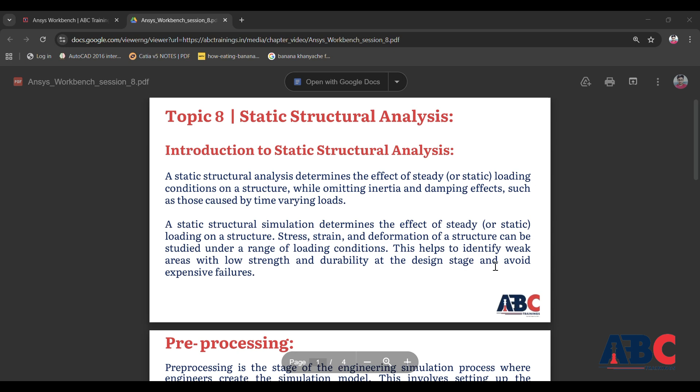Stress, strain, and deformation of a structure can be studied under a range of loading conditions. This helps to identify weak areas with low strength and durability at the design stage and avoid expensive failures.

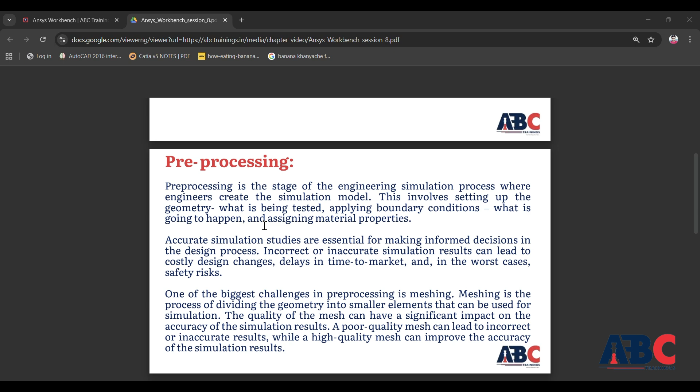Pre-processing is the stage of the engineering simulation process where engineers create the simulation model. This involves setting up the geometry (what is being tested), applying boundary conditions (what is going to happen), and assigning material properties. Accurate simulation studies are essential for making informed decisions in the design process.

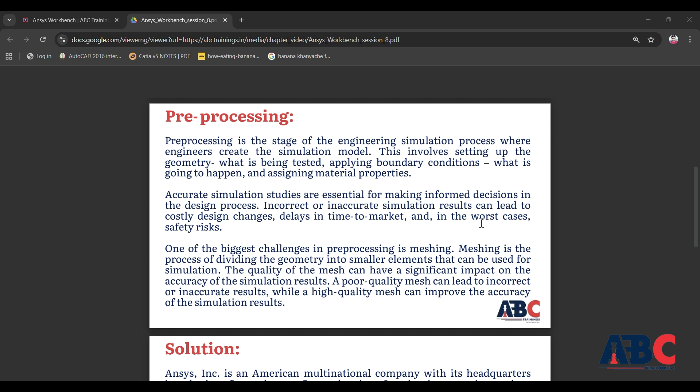Incorrect or inaccurate simulation results can lead to costly design changes, delays in time to market, and in the worst cases, safety risks. One of the biggest challenges in pre-processing is meshing.

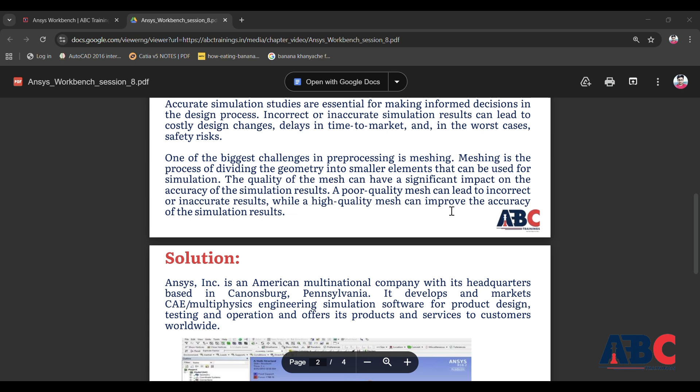Meshing is the process of dividing the geometry into smaller elements that can be used for simulation. The quality of the mesh can have a significant impact on the accuracy of the simulation results. A poor quality mesh can lead to incorrect or inaccurate results, while a high quality mesh can improve the accuracy of the simulation results.

ANSYS is an American multinational company with headquarters based in Canonsburg, Pennsylvania. It develops and markets CAE/multiphysics engineering simulation software for product design, testing, and operations, and offers its products and services to customers worldwide.

Post processing. What is post processing? It is an efficient way of validating the results of an analysis.

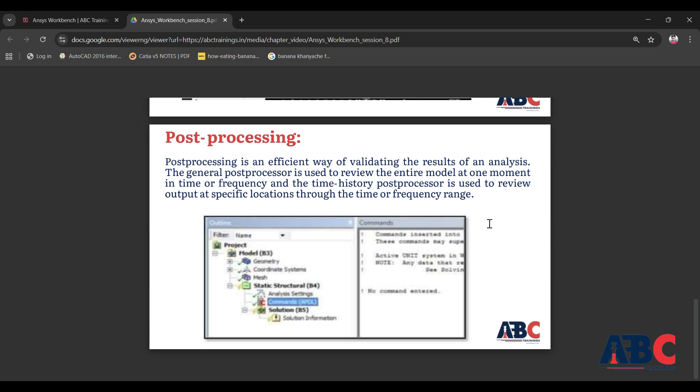The general post processor is used to review the entire model at one moment in time or frequency, and the time history post processor is used to review output at specific locations through the time or frequency range. We will see this in the ANSYS workbench now.

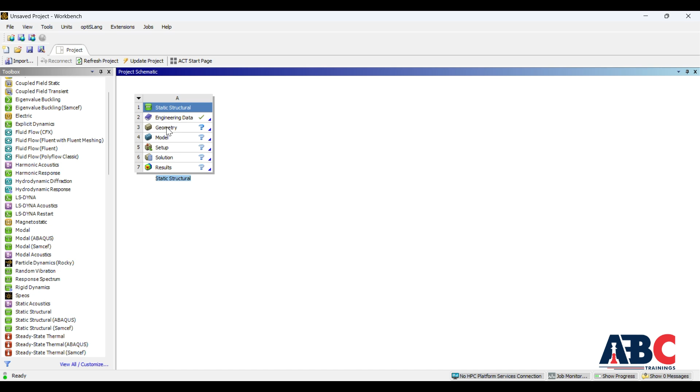Open ANSYS Workbench, you can see here, and select static structural, drag and drop here. Now you can see it is loading. Engineering data is completed. Now on geometry, right click and select new design modeler geometry.

In DesignModeler, you can see select the XY plane, normal view. After that, go into sketching and draw one object, a polygon with six sides.

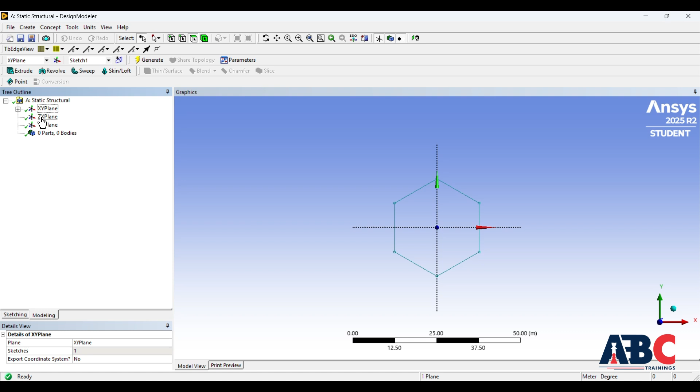You can draw from here. After that, go into modeling, select the ZX plane, and create a new sketch, normal view.

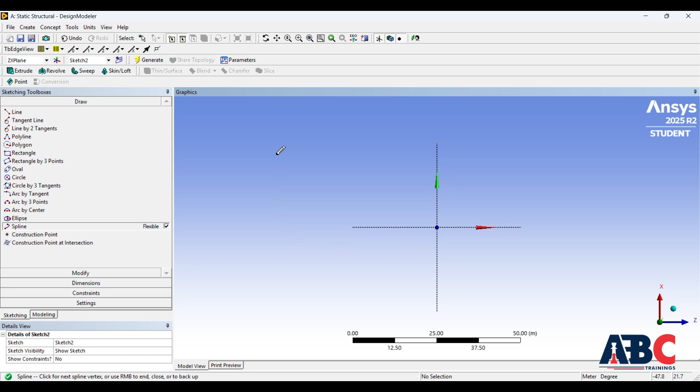And draw one. Go into sketching, draw one spline here. Open it. After that...

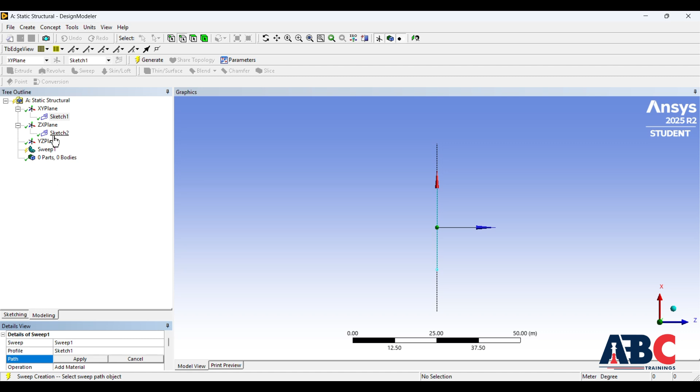In modeling, go into sweep, select profile, sketch, select apply, and path, select sketch 2, apply. I want to move it upside, okay. Now generate. You can see it is generated.

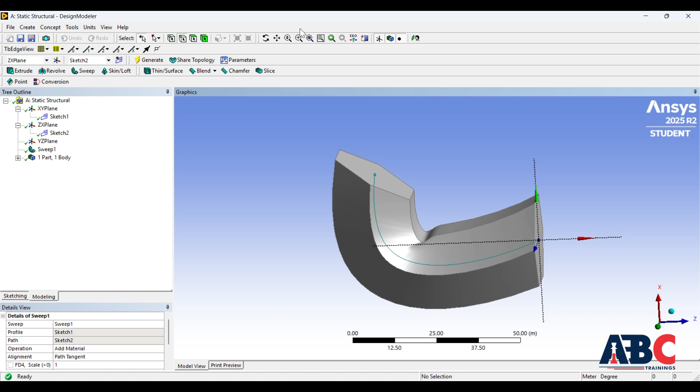Geometry is completed. Now open the main model, double click. Model is completed. Now generate the mesh.

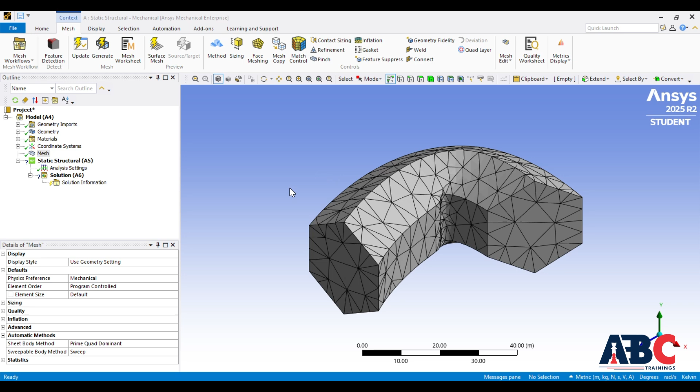You can see, right click and generate mesh. It is generated. After that, go into static structural and add a fixed support.

Right click and insert, and here is a fixed support. After that, select this surface and apply. Now select static structural and again add one force, and now apply to the edge and apply.

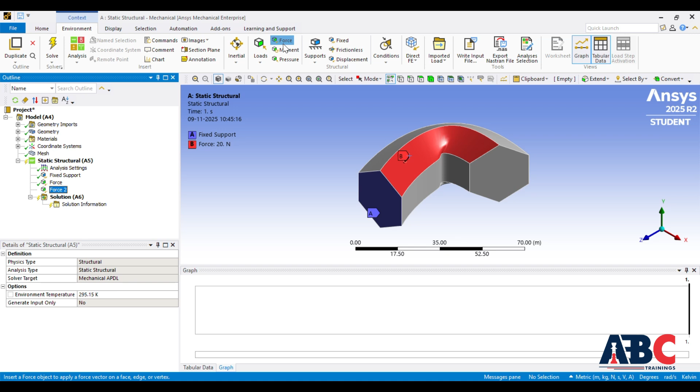Magnitude is 20, enter. Now force 1, it is okay. Force 1, again add one more force and apply to the...

In solution, you can add total deformation from here: total deformation, equivalent stress, and equivalent strain. Okay, after that, directional deformation.

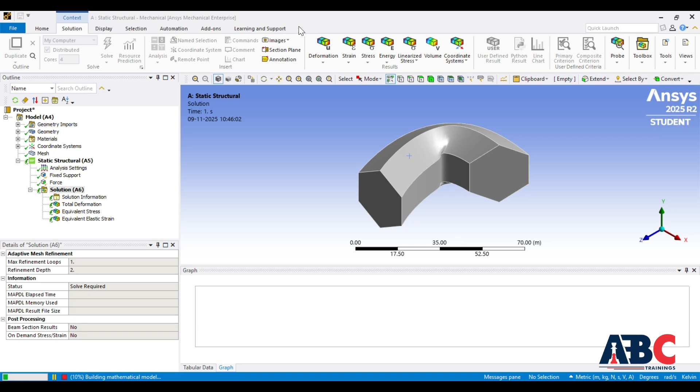Okay, we need to solve it. You can see this is the result solution. Now just animate it. You can see this is the result. Thank you, this session is completed.